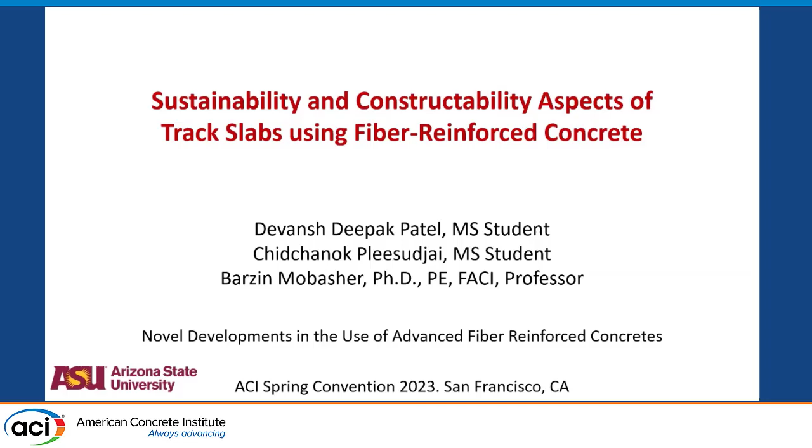Let me give you some background on the subject. Phoenix Metropolitan is about 100 miles by 100 miles, and about 10 years ago, there was a move to develop a light rail system for transportation. One line was created, which goes from northwest to southeast of the city of Phoenix.

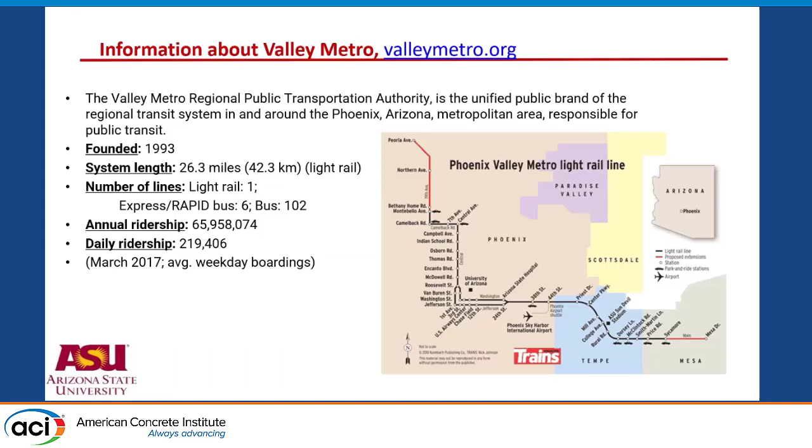In this process, it became quite popular, and somewhere about 60 to 70 million people started using it. Then there was a whole issue of whether it can be extended to other lines, and that idea necessitated consideration of some kind of regional transportation plan.

There was a 0.7% tax that was implemented, and based on that, in 2023, two projects were selected as the next extension. The idea here is basically 5 miles in one direction and 1 to 2 miles in the other direction for this growth.

However, there was a lot of pushback, especially by some of the business owners along the line, simply because of the time and delay it would take, as well as the cost. The cost was astronomical — we're talking half a billion, $500 million for these projects.

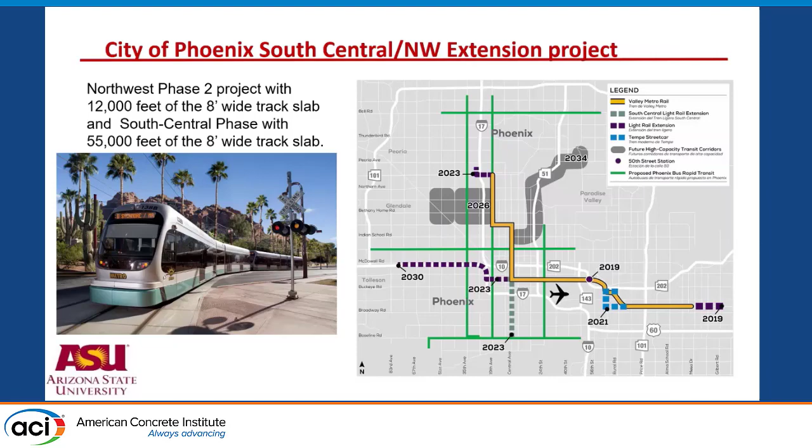At the same time, it would take about 9 months or so per mile to simply construct it, so it would take 2 or 3 years. The businesses were seriously worried about how it would impact people's access to the site.

So there was a ballot measure that went to the entire city of Phoenix, basically saying that if you vote yes, we're going to stop any further development of track rails. All of the money saved will be reappropriated elsewhere, and we're not going to touch this whole idea of public transportation in this particular way.

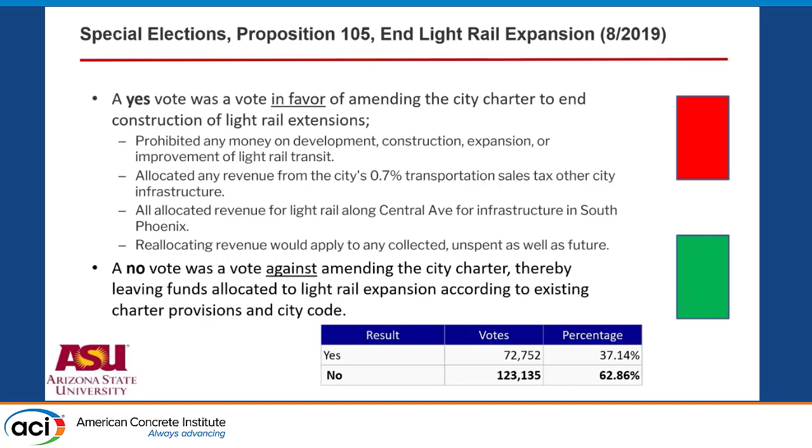The no vote, which successfully won by a grand margin, said that we want the light rail to extend no matter what it takes. So there was a lot of pressure for reducing the cost as well as the time it takes, and I was asked to participate in a team addressing it.

The whole idea was, are we going to use some other alternative reinforcement? My proposal was, let's replace half of the rebars in the section because of the stray current corrosion that necessitated welding of every single rebar and draining of static electricity due to the stray current corrosion problem of the steel.

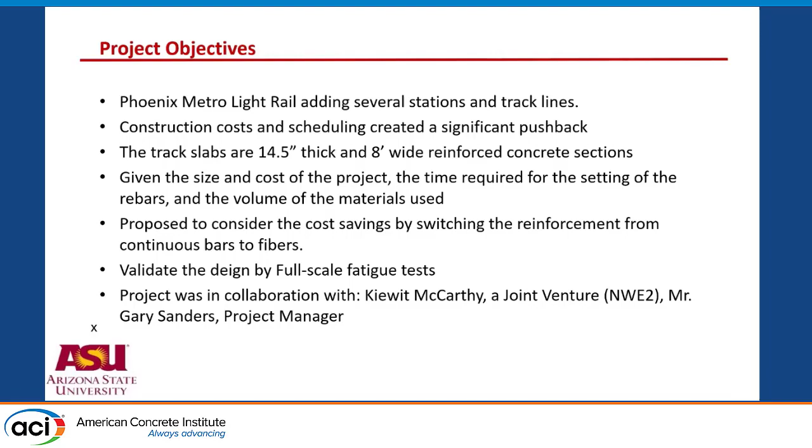So I proposed that, but then they came back and said, what does it take to remove all of the rebar? At that point, I proposed going with the highest dosage we could feasibly work with, for people who have never had any experience with fiber reinforced concrete. We also ran fatigue tests to validate the service life of the system. So here is the problem.

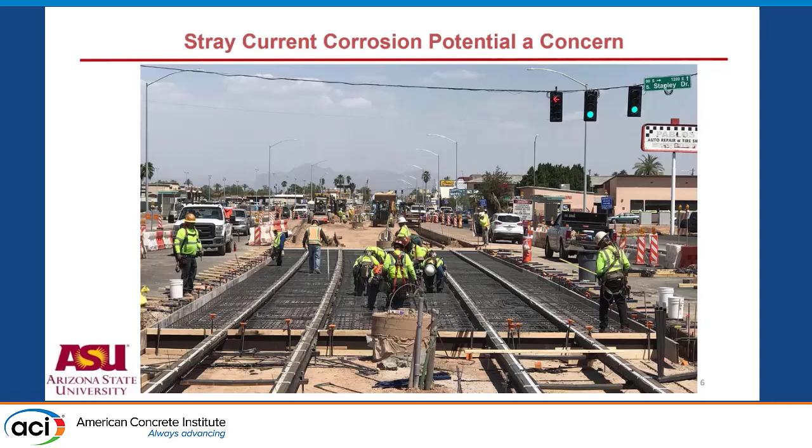In the middle of some of the busiest streets, you have to stop traffic, divert with transportation cycles, and implement a highly labor-intensive process — laying up the rebars for miles, welding every one of them, having inspection, and then placement. The idea was, how are we going to eliminate all of these steps?

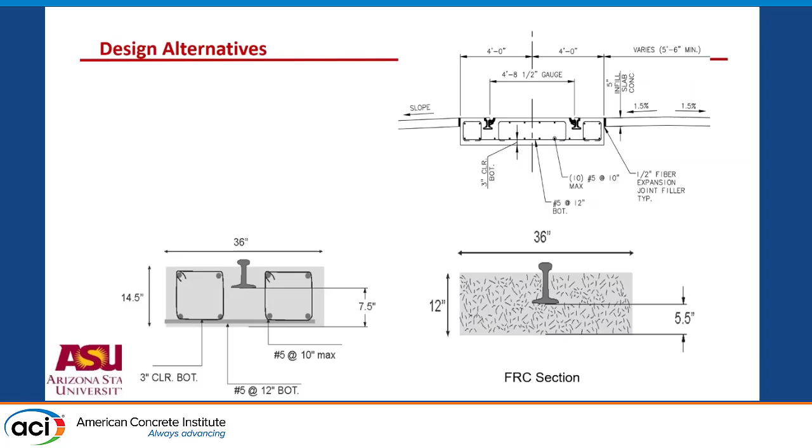Two suppliers were contacted, and they provided their own designs in terms of what they felt comfortable applying. We made 6 panels, or track slab samples, and tested them — one for original concrete, and two for alternative designs. We tested 3 samples under standard load to failure, and the other subjected to fatigue testing.

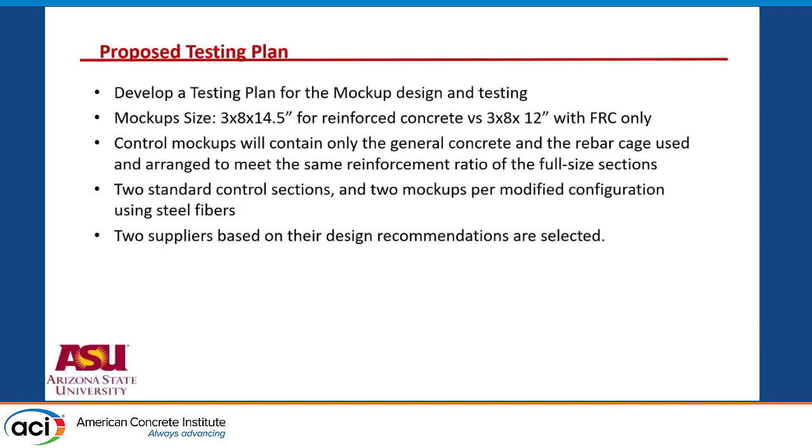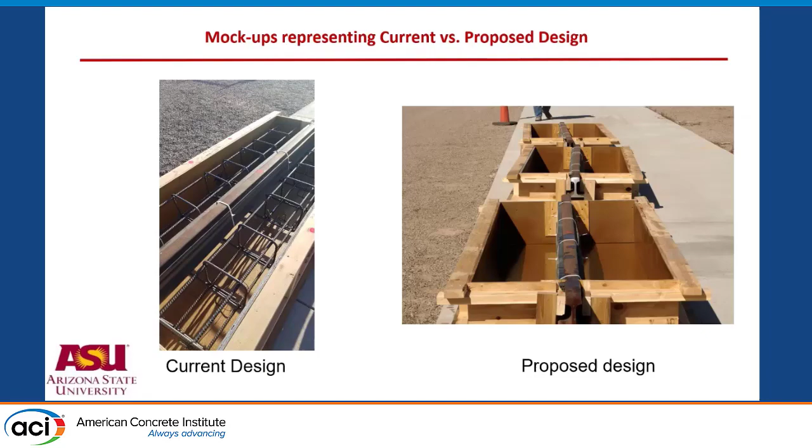So this is basically the description that I provided, control mockups, as well as the two suppliers who provided their design recommendation. This is the pictures of the current control design with the rebar cage placed with strain gauges on the rebars, and then the other one, which is the proposed design, almost nothing - you just set up the rail to the elevation and then pour the fiber reinforced concrete in there.

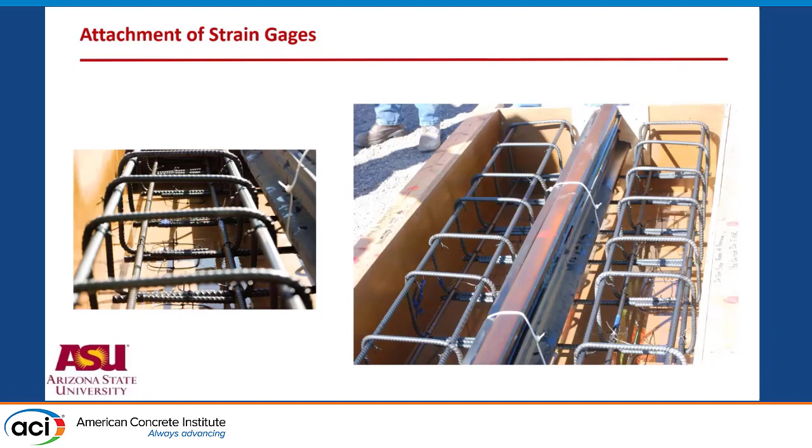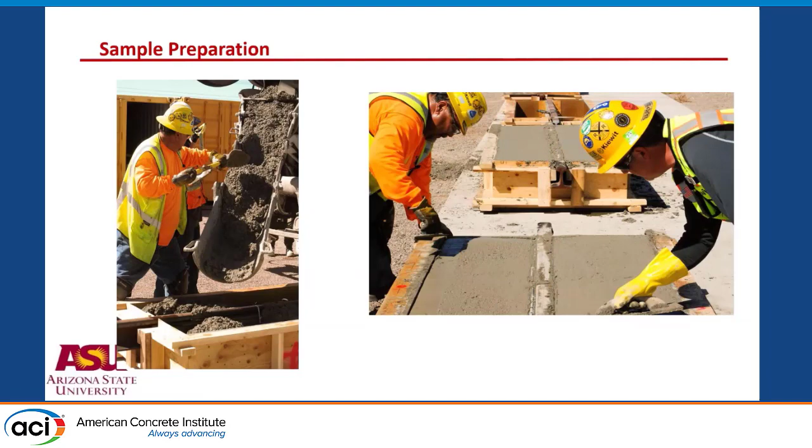This is a picture of the strain gauging of the rebars, because we wanted to test and document how much stress the steel is carrying, to do the structural calculations for it. Standard procedures of making sure the mixes work and can be cast and finished.

Now the question is, if you only have one sample, how do you decide on the fatigue life? How do you know how it works? So we went backwards. To simulate the response under fatigue load, we looked at the service life, 45 years. Then the question was, what is the damage criteria we're going to look at?

The hypothetical situation was: what if we have a water main failure underneath the track slab that washes away all of the ground support, something on the order of an 8-foot length? That's because in our lab we were very comfortable with testing that.

The idea is that for 45 years, nobody notices that the water line broke, and no repair is done, so you have to apply all of the load. The load would be defined in the context of the train car being fully loaded to 3 times capacity, running every 6 minutes, 24/7, for 45 years. That ends up being about 2 million cycles.

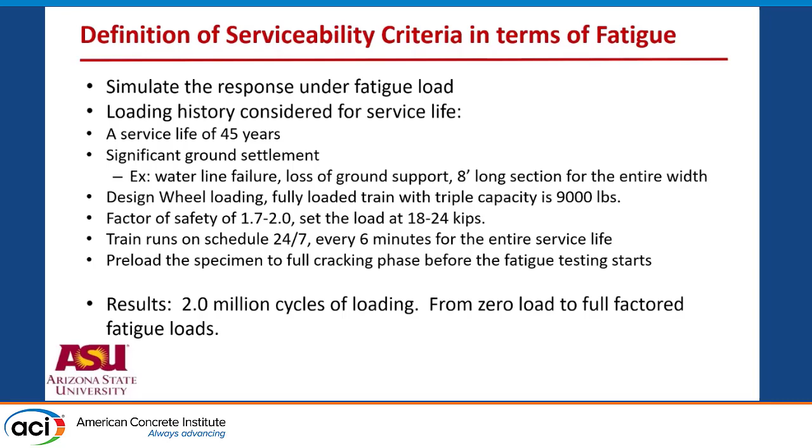So we have to test these sections at 2 million cycles of fatigue, to the load which carries that specific service level loads that it has. So that was the basis.

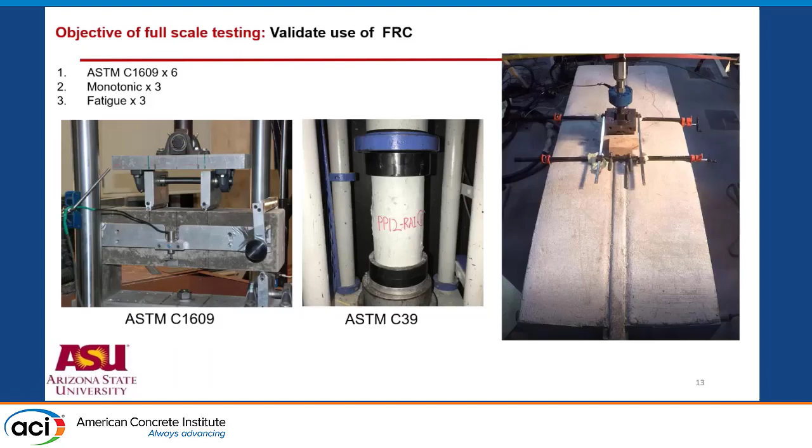Of course, we did the flexural test, ASTM C1609, to measure the material properties and compressive strength from a QC point of view, and then the setup shown here is the track slab being loaded on the test machine. One of the things we do with the 1609 test is document the results in terms of material properties.

We back calculate from the flexural load deflection the tensile properties and the compressive properties, and those can be fed into any finite element model or structural analysis model to actually calculate the contribution of the fibers.

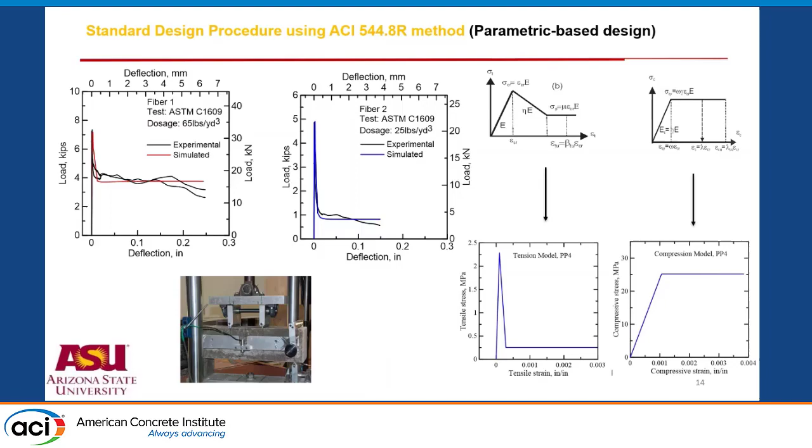So these are basically the preliminary tests done on these samples in accordance with the available standards. The entire specimen is run as a 3-point bend specimen.

The load is applied on the rail, and the rail serves to transfer a portion of the load throughout to the support. So that load we measure is not exactly the level of stress the track slab sees - it sees less load because of the distribution.

But the whole idea is, if there is no support, what is the cracking point that you would have? Of course, we have it fully strain gauged. On the side, you see it's painted - that's for digital image correlation measurement.

Underneath the slab, we have LVDTs to measure the deflection of the slab, and all of this information is gathered.

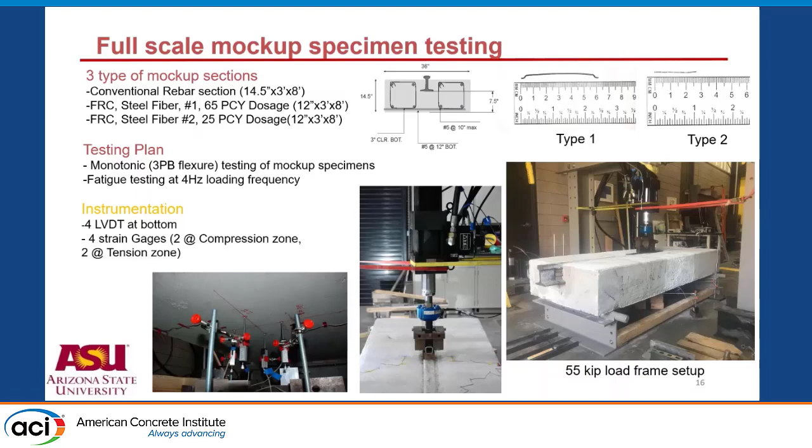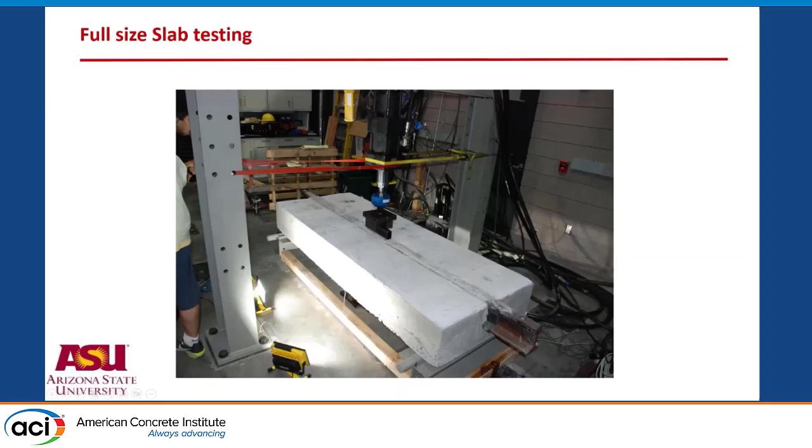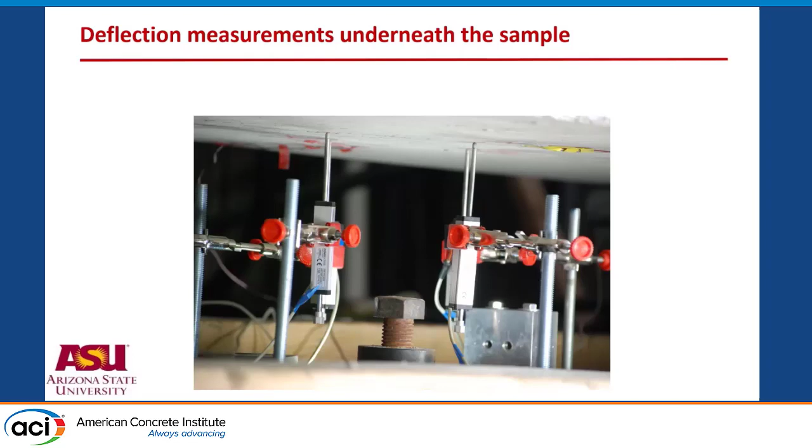I will show - so these are the LVDTs, a significant number of them to measure the response, and what we can see is basically underneath the sample. So now let's see if it runs.

So here you're looking at underneath the sample, as if you crawled under it, and the load is being applied to cause the static failure that we have. So you would see a horizontal crack forming, an opening, as the load is applied in the middle.

So as the beam is deflecting. No graduate students were harmed in this test.

We use the GoPro underneath the specimen. You can afford to lose a $200 or $300 camera, but safety is number one when it comes to testing. At the same time, you can also look at how the crack evolves and forms. We have developed procedures for detection of crack initiation and growth within a flexural sample.

Within this specimen, we can clearly see this is quantitative type of work, which means you can measure the crack opening at any point and correlate it with the load. So you develop this loop type of mechanism where you collect data allowing for measuring the level of contribution of steel rebar versus the other system.

The results we see here are from comparison of 4 LVDT instruments underneath the sample, which almost measure the same response. The load is increased, the sample cracks, the load tries to drop, but the load gets transferred to the fiber.

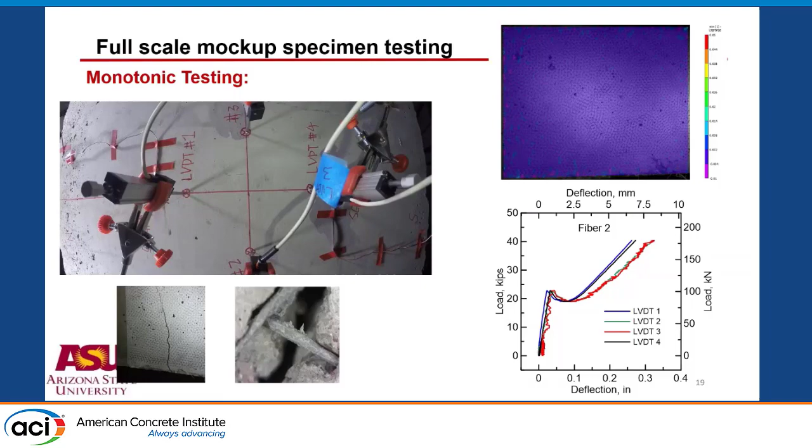So let me go to the next one. This is the type of crack that we see.

What we can do is compare this result to the standard design, which is the reinforced concrete shown in blue, versus the 2 fiber systems, fiber 1 and fiber 2. Note that here the thickness has changed.

The thickness is about 15% lower. When I talk about the cost, the fact that you can reduce the thickness by putting in fibers was good enough for them to fund the project. They figured it would save them $500,000 per mile by simply reducing it by 2 inches.

If your design service load level is 9,000 pounds, which puts you at around a 10 kips load, or around 40 kilonewtons, you still have a significant amount of safety factor embedded in the system. So this is an overkill when it comes to the design.

Fibers provide different solutions. The differences between the red and green curves are associated with the type of fiber and the amount of fibers that were provided by the suppliers.

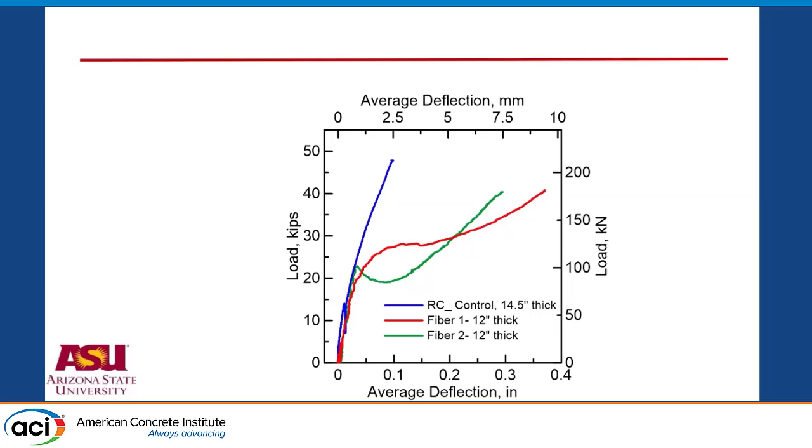Of course, what we've done is the simulation and calculation for these systems. You can see that the simulation relatively well predicts it. We're not into curve fitting - your model has to be completely independent of the test result, which means we're still slightly off.

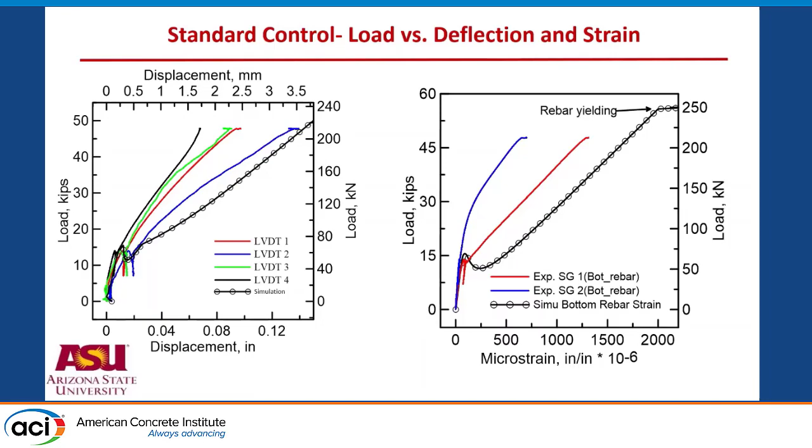But when you compare the load-deflection shown on the left versus load versus rebar strain, we see we're getting a quite reasonable result. The rebar is carrying the load, and that load carrying capacity occurs only after the matrix cracks and the load is transferred to the rebar.

We can also compare, again magnifying the full-scale test. If we magnify the full-scale test, we can see the cracking shown on the blue curve - sorry, having some trouble with the mouse here.

You can see that the reinforced concrete cracks, but the samples with the fibers go much, much higher in terms of their cracking potential.

So there is contribution of the fiber into the crack propagation, meaning that the first main crack, the initiation of load transfer, for the unfiber-reinforced mix is going to be much lower - meaning the steel rebar feels the load much, much faster than some of the fibers in the sample.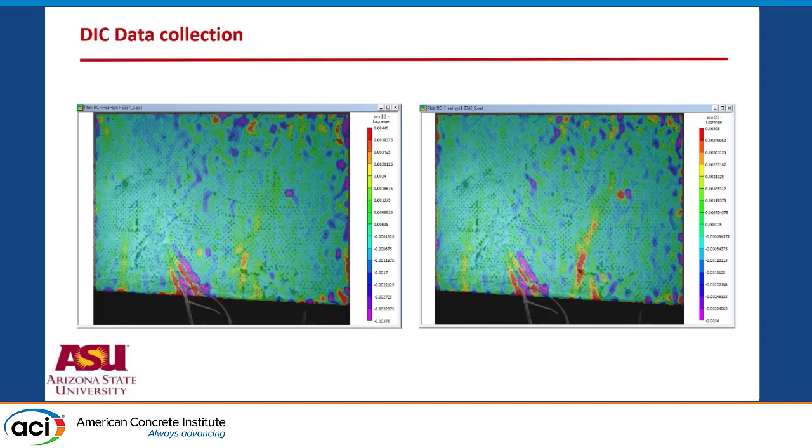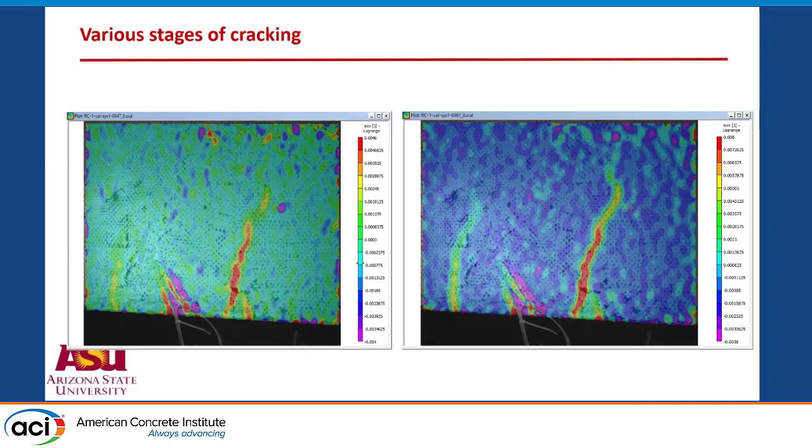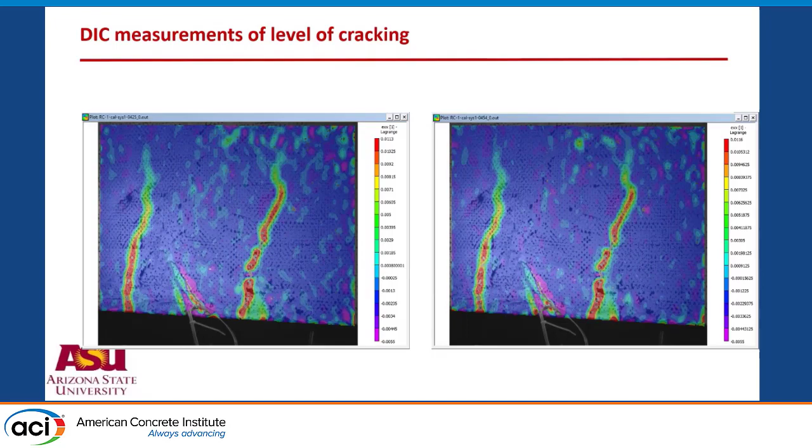The steel remains elastic for that static test that we're doing. DIC allows us to see how the system performs. We can see the initiation of one crack later becomes another crack, and you can see the crack is about to evolve here - these deformations are displacement and strain maps. Again, 3 cracks forming, so this is good because we have good reinforcement, and the reinforcement is causing distribution of the load, and as the cracks open up, the magnitude of the opening is so small. This is the needle in the haystack that the DIC equipment provides - it helps us in better understanding and characterizing the results.

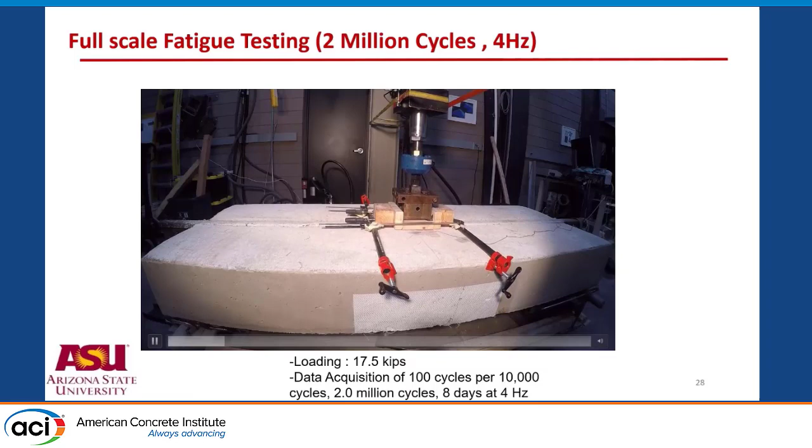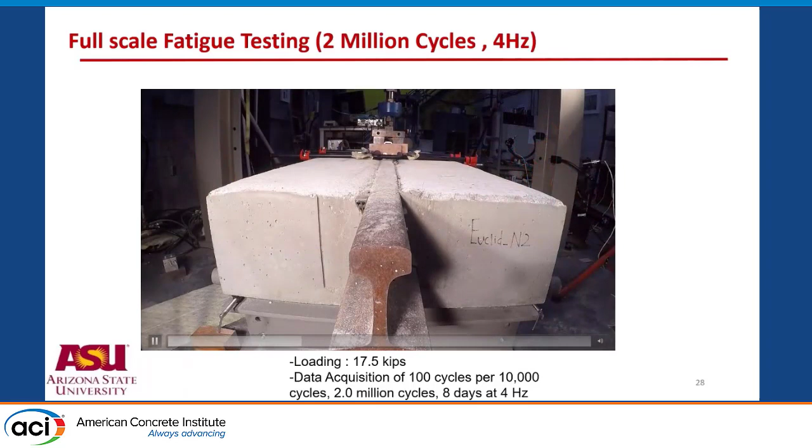So here, let's take a minute video - the fatigue test. We're running the fatigue test at 4 hertz, 2 million cycles, takes about 8 days to run. This was done after you load the sample to full cracking. So first you load it to full cracking, and then subject it to the cyclic load.

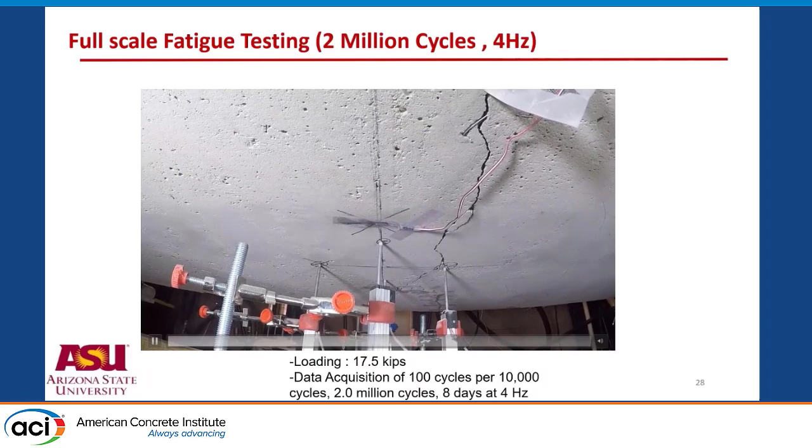And this is underneath again with the GoPro capturing the deformation. So we're exercising this existing crack that we put in there, and then we can do the data acquisition and measure the cyclic response and the opening of the sample at the end.

This is the DIC done on the fatigue test. You can see how the crack is being exercised in the context of opening and closing 4 times a second. So this is a slow motion of the fatigue test - maybe about 4 seconds within the entire 8 days being shown here.

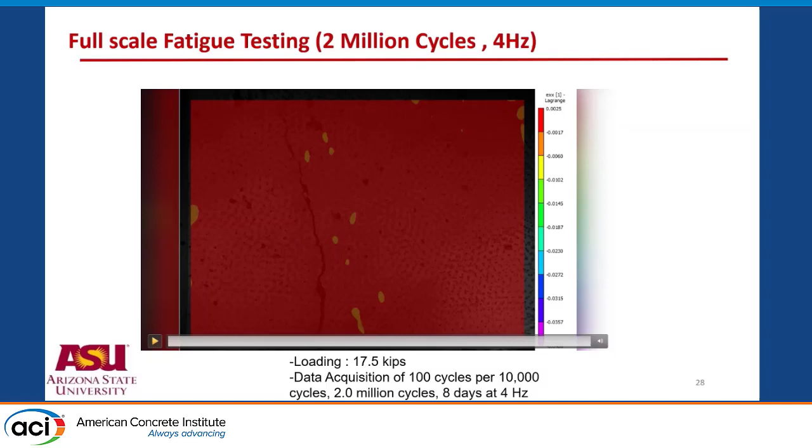Am I done? I think so.

So one of the analyses we have to do is look at the fatigue results. We look at every 10,000 cycles, collect the data for 100 cycles, and then look at the load, unload, loading, unloading - that response is used to calculate the stiffness.

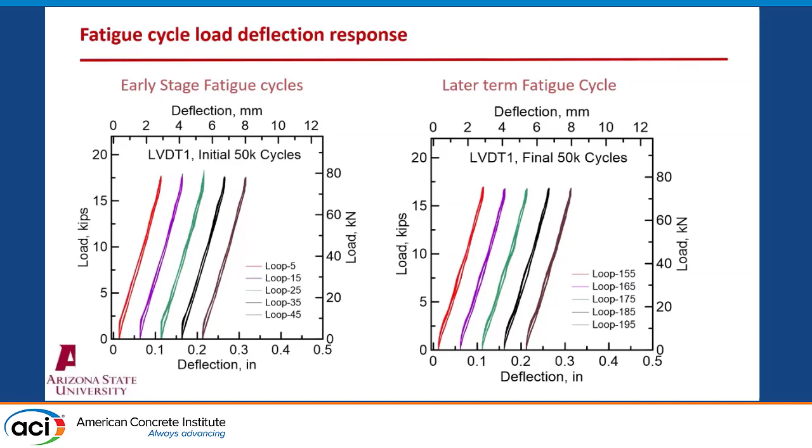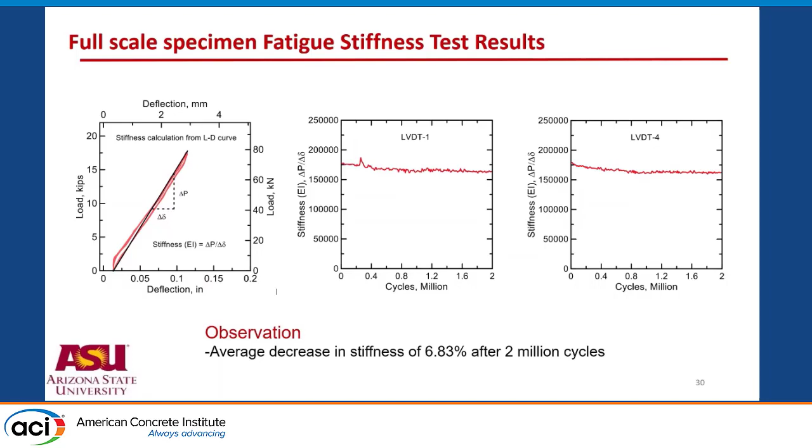Is that something that we can live with? That's something they decided they want to do. And then we did also some structural analysis calculation - take the information of the rail, calculate the stiffness, treat the rail as a beam on elastic foundation. In other words, the stiffness of the rail helps carry some of the load and doesn't let the full force go to the sample. It goes directly down. So it's a very simplified structural analysis model.

And it allows us now to add the response of the rail, which remains purely elastic, to the response of whether you have rebar or fiber reinforced concrete. Add these two up, and you get the responses that we measured in the experiment's load deflection. These are shown for the fibers and for the reinforced concrete - basically the blue curve changes from one case to the other, and we can relatively see how much it goes up to the yielding of the rebar.

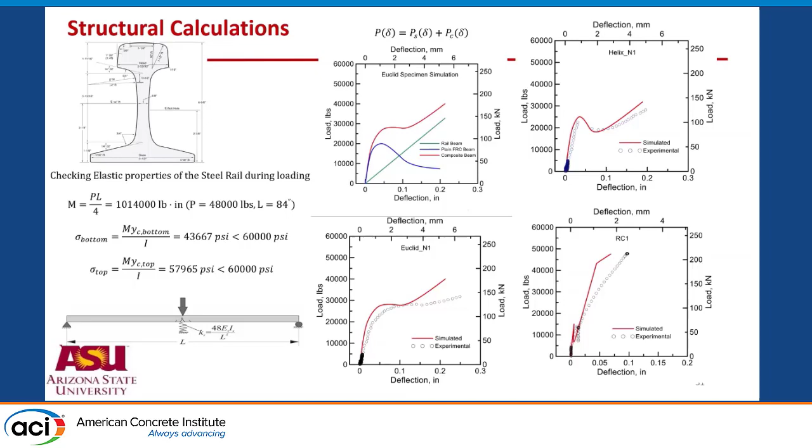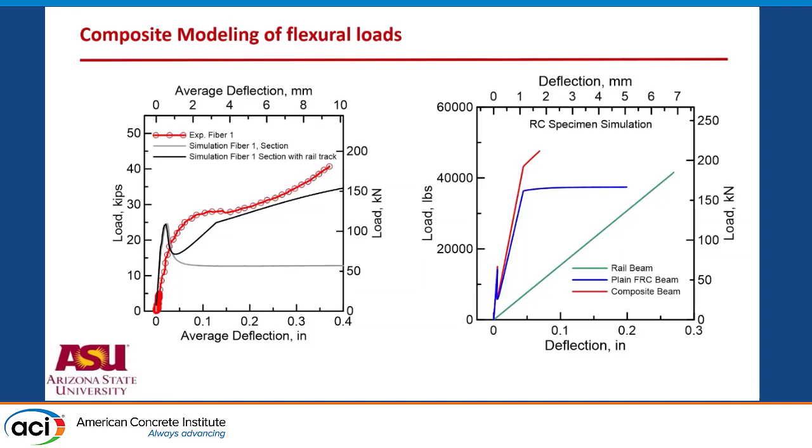Again, this is another set of comparison - what is the difference between the reinforced concrete and the fiber reinforced concrete? Mind you, we're only looking at a service level here, 10. So everything we're getting in the fiber domain is additional ductility that lets you go much, much higher. But in the unreinforced - reinforced concrete - your deformation before yielding is somewhere about 0.05, much less than 0.1 inch.

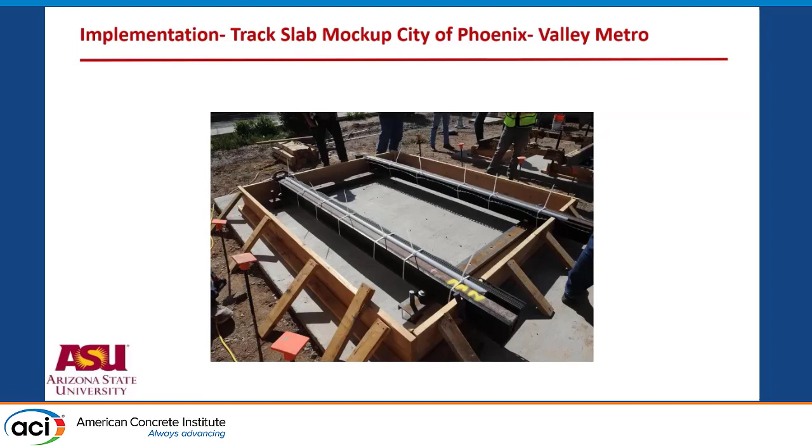Next step was doing another trial batch, but this is for the crew and staff to get familiarized, because once you approve the project, you have to construct it, and for several months the area is going to be contained. So now we went with 2 sets, and that clearly shows - you can see the fibers being cast, people feeling comfortable.

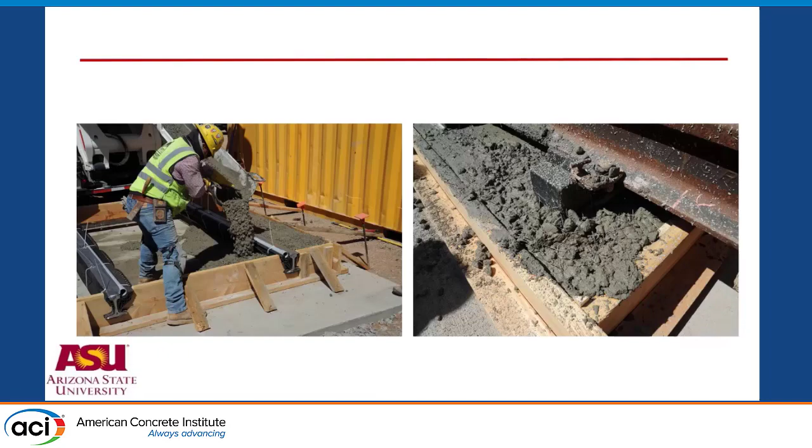The trial was quite comfortable because people brought a bunch of staff, but the concrete was self-flowing. You could consolidate it very easily.

This is actually the job project in progress, set up and run. What happened in this process is that they realized very soon that the placement of concrete and placement of rebar no longer became the critical path in the project.

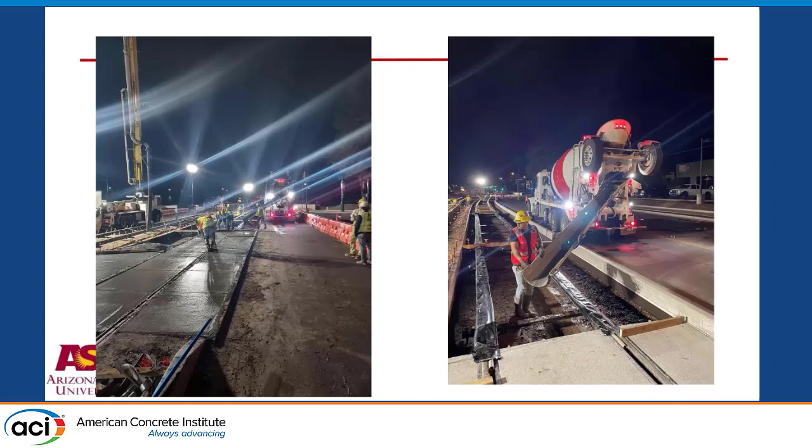The critical path in the project became the grading, layout, and groundwork, which took a significant amount of time, cutting back significant time from the construction and placement. They were going so fast that they had to finish and stagger their concrete casting schedule because the ground was not ready to accept the casting.

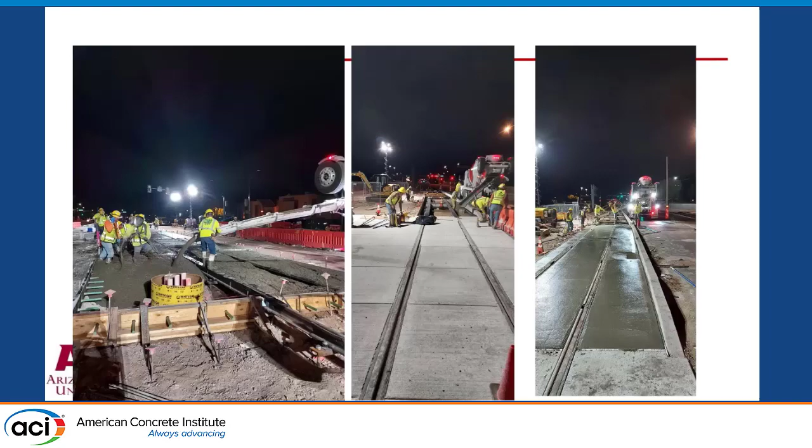That's a good cost, but if you're buying so much, you can probably negotiate it down further.

Where does that saving come from? The project that should have been scheduled for 21 days was done in 11 days - that's a savings of 10 days. One labor day is a crew of 10 people working, so you're talking about the costs involved with the labor.

The entire mile of track, which was supposed to take 231 days, almost 6 months, was done in a matter of 3 months, 121 days. That basically led into the calculations of 3309 versus 1013 and the savings that we had.

I think they're excited, wanting to try new systems and technology. I think it's comfortable for people. Once contractors and everybody else start working with fiber reinforced concrete, they don't want to go back. Show me a project that you have to do with rebar which cannot be done with fibers, especially when it comes to these types of track applications.

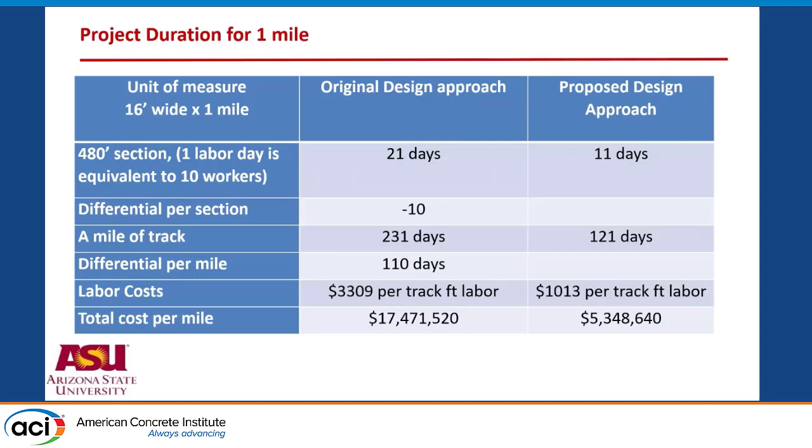I don't have any conclusions. I hope we can continue with this type of project and approach. Thank you very much - I'll take any questions you may have.